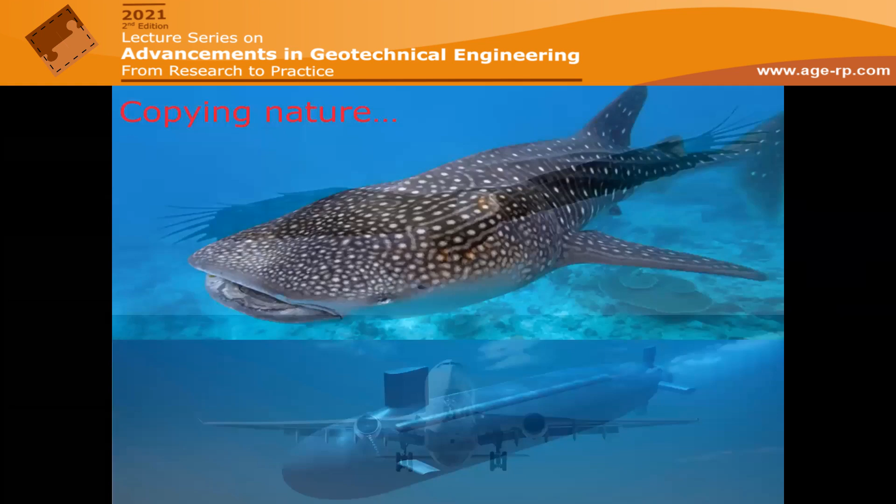So looking at any fundamental engineering concept, if you look closely you'll note that we engineers in many of these concepts actually copy nature. Like in this picture, we see an aeroplane designed as a bird lookalike, a big eagle, or a submarine designed as a whale lookalike.

More relevant to our subject today, if we look at the soil strengthening concept and how birds form their nests, the principle is very similar. They use mud and sticks to reinforce the wet soil to stay together, using weeds and branches - just like human beings, especially in developing countries, who still use the same technique today, combining wet soil or mud with branches or hay or sticks to create adobe bricks, still used to build houses in many parts of the world.

But the soil strengthening concept started way, way before. If we look closely behind these magnificent structures and try to understand how they're still standing, the first examples of soil strengthening date back to more than 3,000 years BC in the Ziggurat Walls. At the time the area was called Mesopotamia, today's Iraq. These structures were constructed using woven mats of reeds laid between sand and gravel - this is the concept of reinforced soil. Most of these ziggurats formed parts of temples for worship, also called stairways to heaven because they were very tall structures.

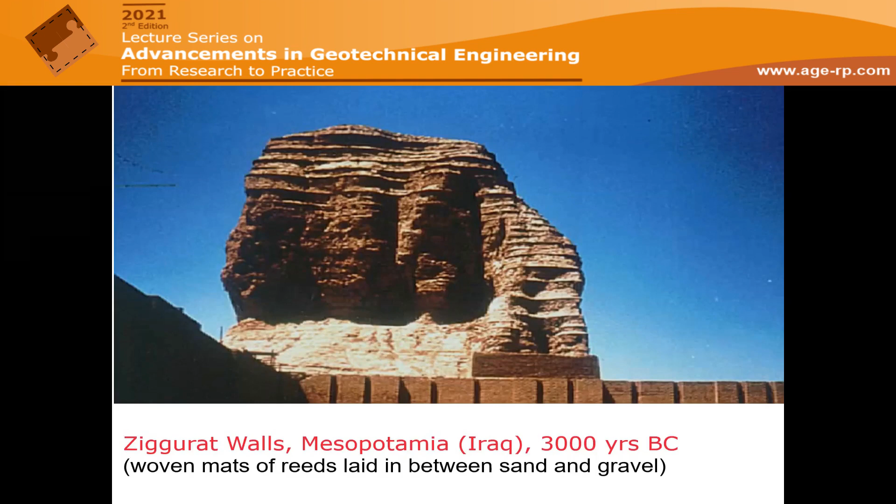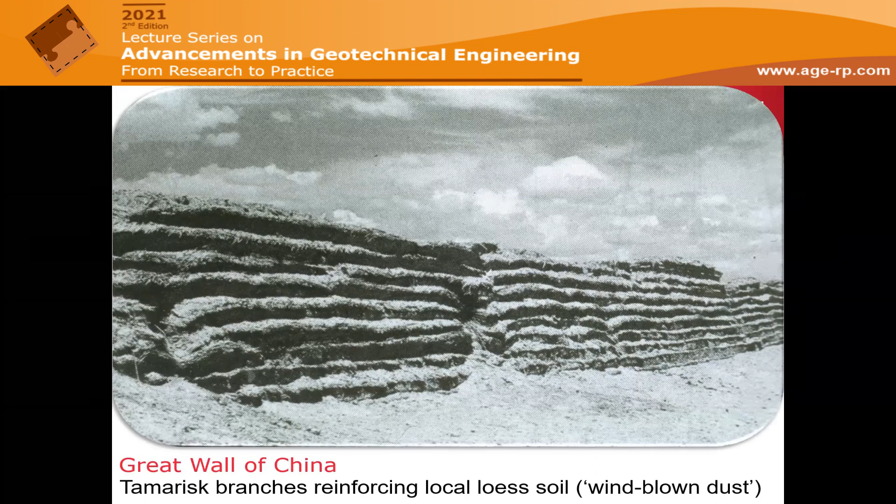Then looking further east, the Great Wall of China - many sections were built with tamarisk branches reinforcing local loess soil, also known as wind-blown dust. This is one of the beauties of reinforced soil: you can put it together using material available where you are. We'll see more about this a little bit later.

Even closer, further down the history, in Roman times, they discovered a timber wharf forming the Port Londinium, as it was called in Roman times, London. They found this 2-meter high port wall preserved in pretty good condition, preserved in the Thames mud, the river in London. This was just timber with soil, as you can see.

And credits - I'm going to be mentioning Colin Jones' name quite often throughout my presentation, because he helped me a lot to put this together, mainly for the historic part, through his book that he authored in 1985. I'm good friends with Colin, and we're still in good contact. He was very happy that I was putting this together, going back in history of reinforced soil walls.

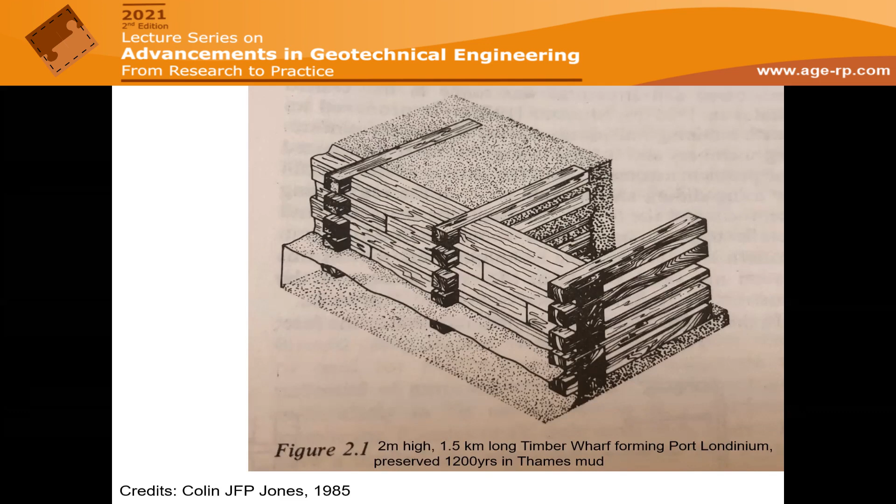Even closer, 1822, the Royal Engineers, people very close to my heart, were pioneers. General Sir Charles Pasley was the first to build retaining walls with brushwood, wooden planks and canvas, because he realized and proved that the inclusion of these reinforcing layers results in significant reduction to lateral earth pressures. There you go - the concept of reinforced soil earth in one small paragraph, conceived by this general of the army back in 1822. He had no numbers and didn't write any design books, but he used the materials and built these long-lasting structures.

So how did we evolve to modern structures? Well, the fundamental engineering concept of soil strengthening - nowadays we call it soil reinforcement - hasn't changed. Conceived thousands of years ago, it's still about placing geo-elements between soil layers to add strength and stiffness, as we've been analyzing further these days.

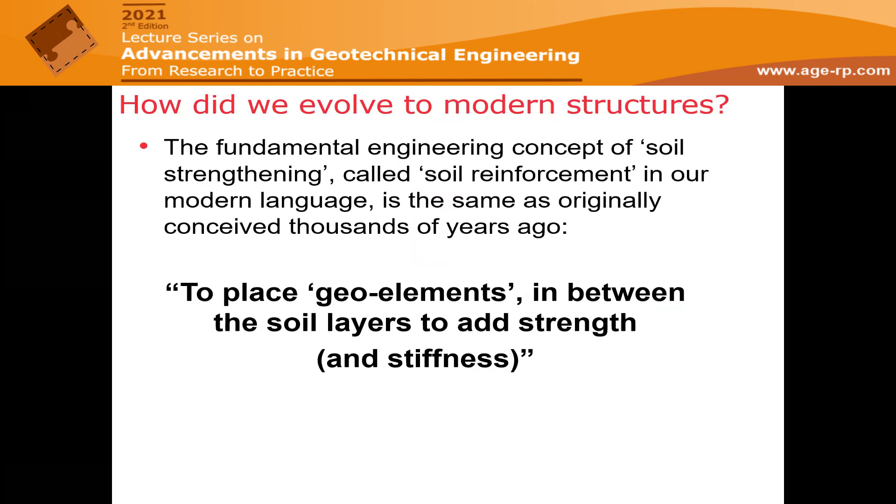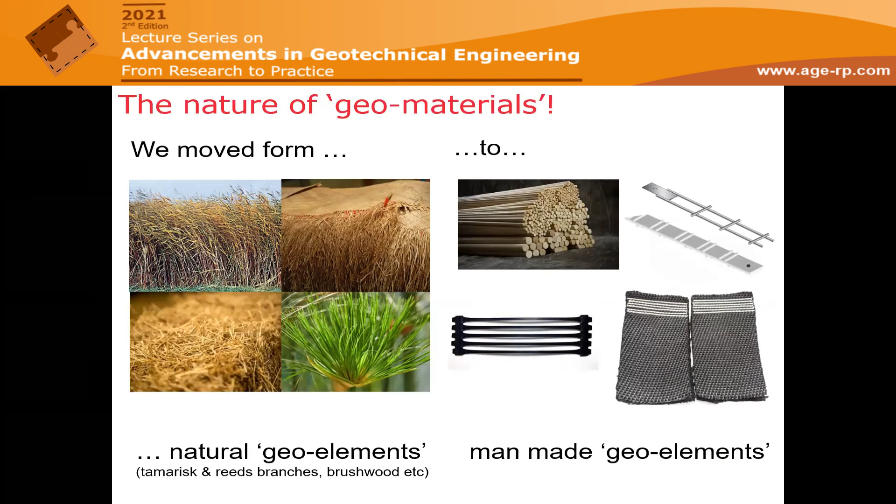So what changed? Well, the only thing that changed is the geo material. In the olden days, they used natural geo-elements, like we saw - tamarisk, brushwood. But nowadays we use man-made geosynthetics or geo-elements. We can use steel, timber - like proper fabricated timber - and of course polymer, like plastic, polyester, which we'll see in a minute.

Back to Colin Jones' book - the very first example of reinforced soil in modern days was in 1925 in USA, the Munster earth retaining structure, which was like wooden ladders that go behind the wall with a very light type of facing.

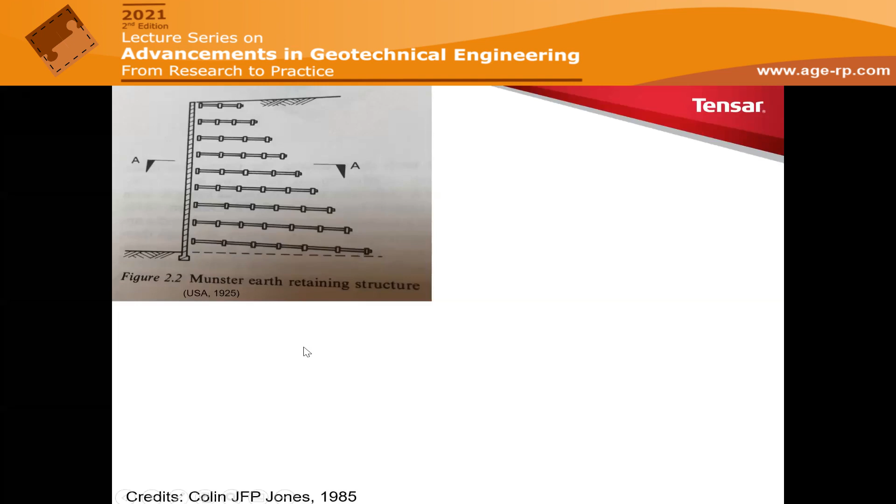Then in the 1930s, the Coyne retaining wall came along, with short metal ties with anchors, selected stone fill, and concrete precast facing at the front. As you can see, the way they placed this concrete facing, one inside the other, was purposely done so they could allow movement, because these people who started the concept of reinforced soil already understood it's a flexible structure - so whatever we do, we need to be ready for it to somehow breathe and move.

The third example, perhaps the most well-known, which most of the audience would have heard of, was Vidal's invention or evolution in 1960. He used flat iron strip reinforcement connected to U-shaped steel metal channel facing. He actually commercialized the concept and patented this MSE wall as Reinforced Earth, and I'm sure everybody knows of this system nowadays, with concrete facing.

And the last one, going back in history, probably a lot less known, is another method called the York method, developed in 1973. Again, Colin Jones was pioneering the development of this. It was just hexagonal concrete facings reinforced with glass, and the reinforcement strips behind the facing were also reinforced plastic with glass.

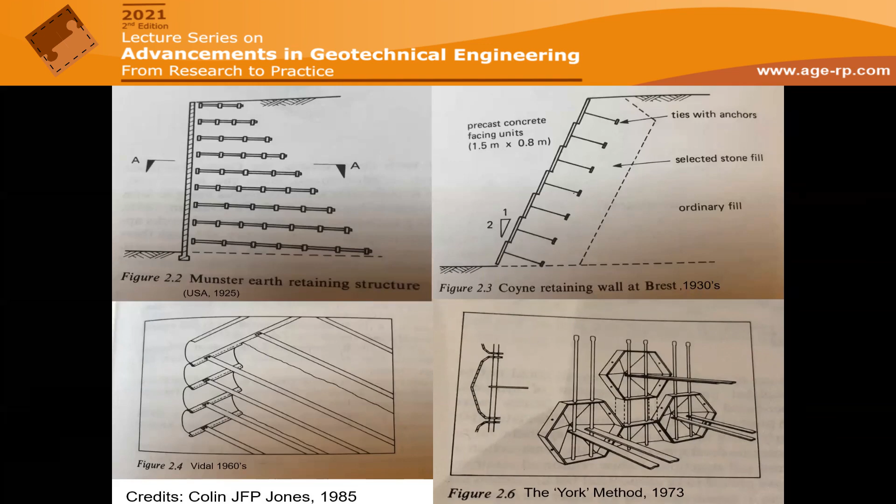This technology was first invented by a company called Netlon, and I think in many parts of the world, or for the elder people in the audience, will remember and recognize the name Netlon. And while these meshes were developed, through a lot of research and trial and error, a heavier net was developed through the same manufacturing method - extruded polymer.

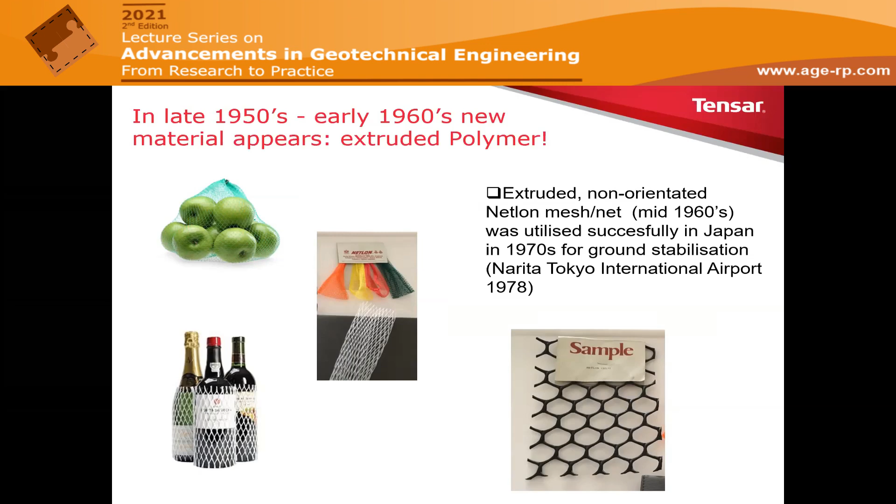But the mesh that they developed was slightly thicker, and the Japanese found out about it, because they always do. They looked at it and thought that this would have some engineering properties, or improve engineering properties, and they used it for the first time, very successfully, in Japan in the 1970s to improve the bearing capacity in Narita Tokyo International Airport. There are some photographs of laying this Netlon mat in Narita Airport, and they found out that it performed really, really well.

So the person who invented this new material, extruded polymer, was Dr. Brian Mercer. Dr. Mercer was British, born in the northwest of England, where polymer geogrid was also born. He was also a good friend of Salvador Dali.

There is a painting that Salvador Dali did of Dr. Mercer, which Dr. Mercer donated to the Royal Society in London, where he was an honorary fellow. It's hanging in a room named after him, the Mercer Room. And there's a photograph of Dr. Mercer explaining the properties of the geogrid to Salvador Dali.

So if we were in a room, I would ask you, who is the father of soil mechanics? Everybody involved in geotechnics would know that is none other than Karl Terzaghi. But now you know, if I ask you who is the father of geogrids, that's Dr. Brian Mercer.

So following the success of the Netlon mesh in Narita Airport, Dr. Brian Mercer saw a gap, because he was a great technologist but a great entrepreneur as well. He saw a gap in the construction industry, and he focused his interest and efforts, and he joined up with a group of mechanical and chemical engineers, and he came up with the Tensar process. So they used polymer, and not only extruded it, they punched it and stretched it.

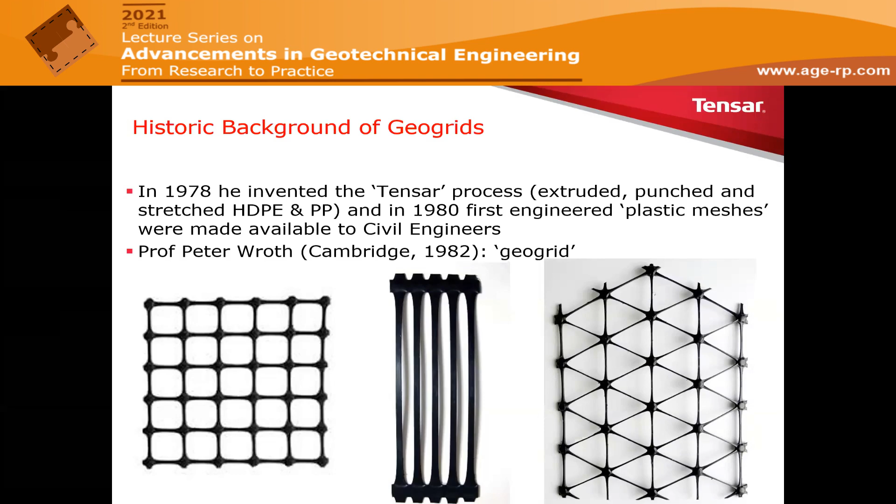So anyway, he went to places like Cambridge and Oxford, Strathclyde, places in America and Australia, many universities around the world, to find out how these geogrids perform. And like I said, true to his legacy, Tensar itself carries on innovating, and in 2007 we invented the evolution of the square geogrid to the hexagonal geogrid, but we're not going to talk about this today.

So, great invention those days. Imagine going to a civil engineer in 1980 and telling them you can build bridge abutments with plastic. People, the engineers, would just look at you and raise their eyebrows and say, I don't believe this.

However, we did manage to start convincing the important people in the UK. So we got the royal approval, and here it is - and today is a somber day, or this week it is, in the UK, as today is one week since His Royal Highness Prince Philip has passed away. But this is happy days, and in memory, Dr. Brian Mercer meeting Prince Philip and demonstrating how the Netlon grid works.

So like I said, how did an unknown entrepreneur from Blackburn convince the world? Well, there were pioneers and open-minded people and visionaries who gave us support. They saw the benefit of these products and the potential. One of these great supporters, Richard Bathurst, was one of them too, because he saw the feasibility of these new products. But a great visionary and supporter was Professor Colin Jones.

And I am very, very - I had a few various conversations in the build-up of this event with Dr.

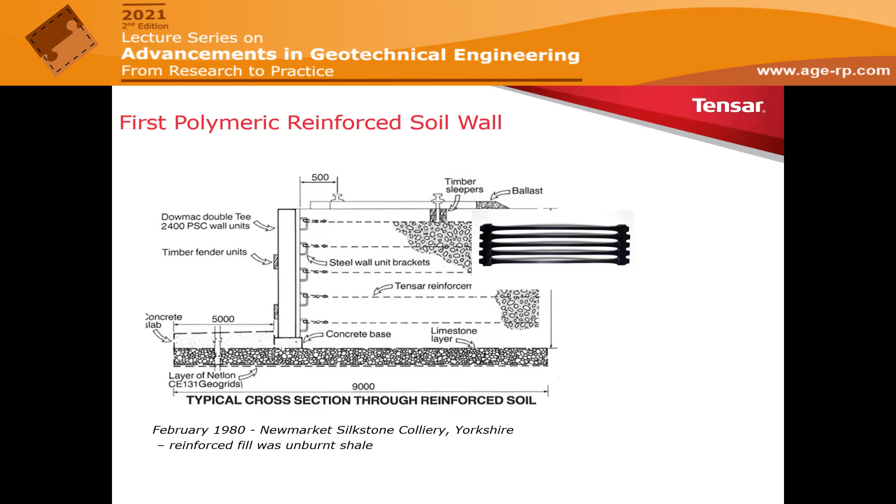They had an existing railway embankment. It wasn't high, only 2.5 meters high. But as you can see, it was eroding away, and you can see the sleepers hanging over. This railway was carrying all the mine waste from surrounding coal mines in Yorkshire, because in those days coal was the main source of energy. So they had to remediate this embankment, because of what it was doing to the tracks up above, causing a risk of derailment, as well as slowing down the production and the whole cycle.

So what Colin Jones did, he came up with a fantastic idea. Remember, from the beginning, you always have to remember that these are flexible structures, and you have to allow and cater for some sort of movement. In this particular case, Colin Jones designed a reinforced fill. They actually used the mine waste, which is soft and wet and not particularly strong, as you know. As a facing, he used these precast wall units, but the clever bit came in the way that he connected the facing, reinforcing the mine waste with our geogrid.

You can see the Tensar geogrids, but the way he connected them to these steel wall brackets - why did he do that? Why didn't he cast them? Because he knew that this material would move. So he allowed for controlled settlement. The geogrid could slide down as the mine waste was settling over time. So that was very, very clever. And of course it worked.

Also at the base, because the existing foundation soils were not brilliant either, he used the same material, this Netlon heavy mesh that was used in Narita Airport, to enhance the bearing capacity of the existing soil. So there you have it - that was the very first wall, and he used timber fender units, because of what would happen here. Let's go to the next one. I thought I had a photo of the finish, never mind.

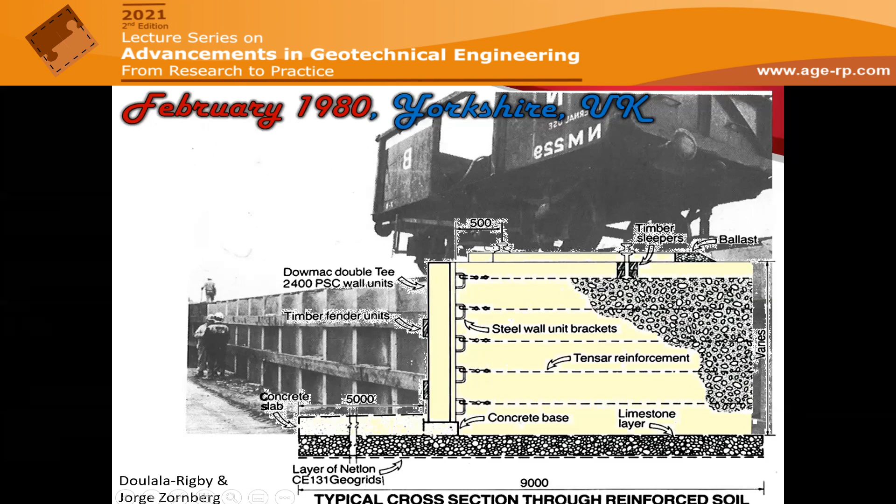What was happening was that the wagons would bring in the coal mine waste from the surrounding mines, tip it over here, and big lorries picked it up and disposed of it safely. This was the reason why he used the timber, to protect these precast wall units. There is a paper on that I co-authored with Colin, published in Berlin, I think in 2014. So that was the very first civilian wall for railway purposes.

At the same time, the Royal Engineers heard about this product, and they too realized the ductility and the flexibility that an MSE wall structure has because of this material. Again, with no design method, Colin also worked with the Royal Engineers, Professor Johnson, and helped them design and build these walls. These walls were built to protect what is in this building - ammunition - using these walls as ammunition blast bunds. So in case something went wrong and there was an unplanned or accidental explosion, they contained the explosion, because any shrapnel would be nicely absorbed and contained within the flexible Tensar walls.

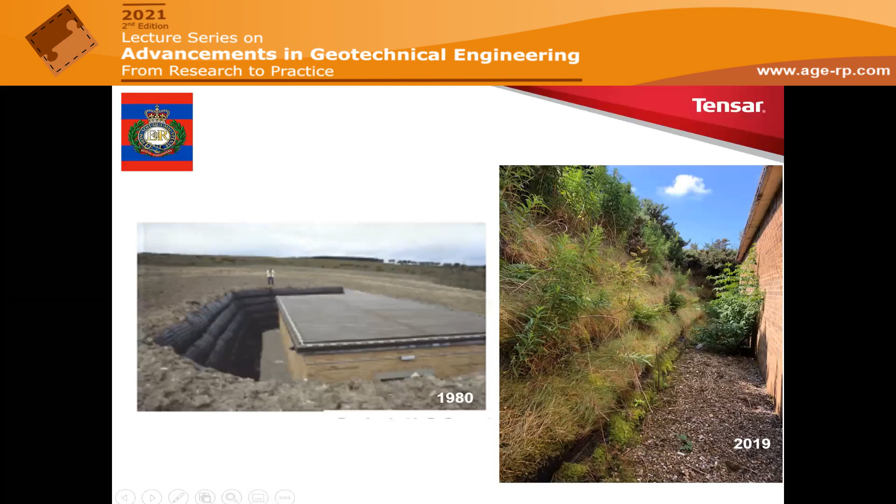So that was in 1980, and this is 2019, where I had the privilege to go and visit this same wall. So this is the building, the back face of it, and this is the slope, which is still standing up 40 years later, absolutely no problem with it, nice vegetation. So very, very good testimony of the resilience of these structures. And from these humble beginnings of almost 40 years ago, nowadays we've moved to structures that Dr.

Mercer would have never dreamed that we would ever reach that high. So this is our highest wall, Tensar's highest wall, and one of the highest MSE walls in the world. It's 60 meters high, it's a tiered wall, as you can see, built in three sections of 20 meters each. It's in the Middle East.

It joins Fujairah and Dubai, and it's not just a wall, it's an embankment. We'll see more of this later on, but the actual construction is pretty much similar to where we started 40 years ago.

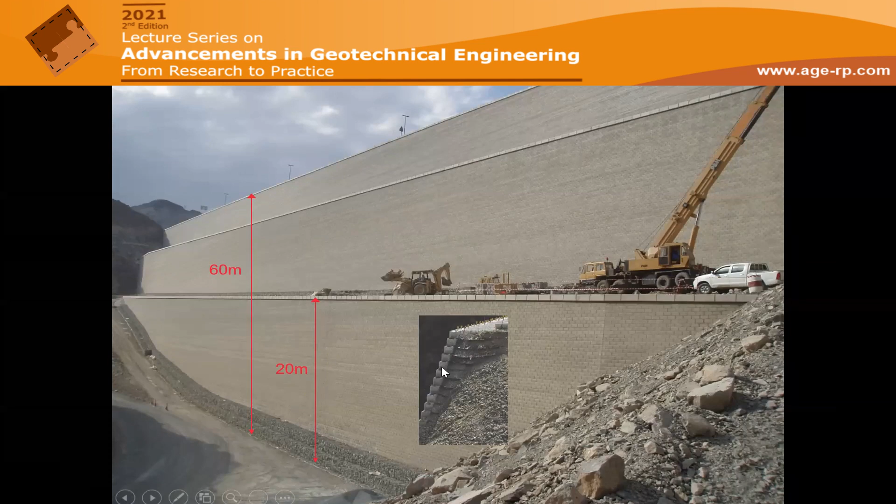The way this wall is built is just dry laid, and that's why it's so fast and easy to build. There are geogrids, good granular fill, compacted, and just modular blocks at the face, dry laid. The geogrids connect in between the facing blocks to a blue connector, creating a very nice mechanical connection, which is actually fantastic in performance, especially in earthquake regions - but that's a different subject altogether, so we don't have time to talk about it today.

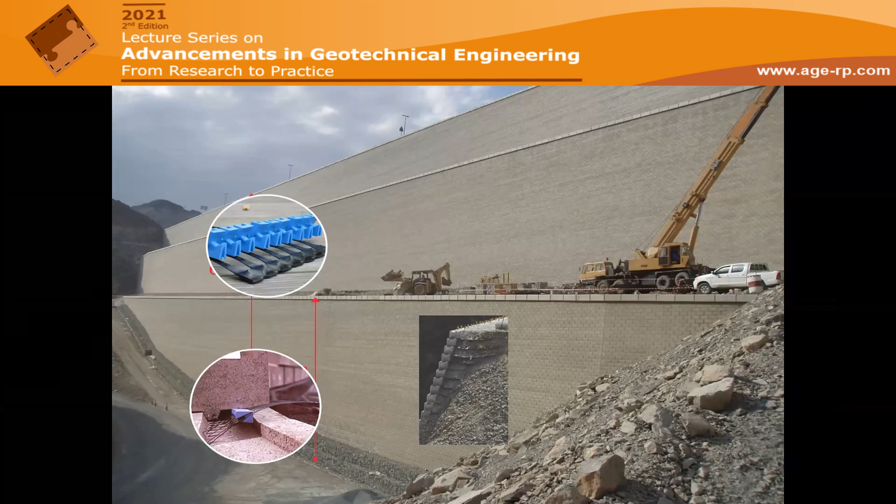Because of the week that we're going through in the UK, I just thought, as a tribute to the big man, His Royal Highness Prince Philip - I don't know how many people know about his involvement with engineering. There's been quite a few posts in social media and LinkedIn, but whoever did not know, Prince Philip was fundamental in the establishment of the Royal Academy post-war, because he wanted to connect all the different engineers - mechanical, electrical, chemical, civil - to rebuild England. He was a very big supporter of engineering, and he strongly believed that engineers are amazing people.

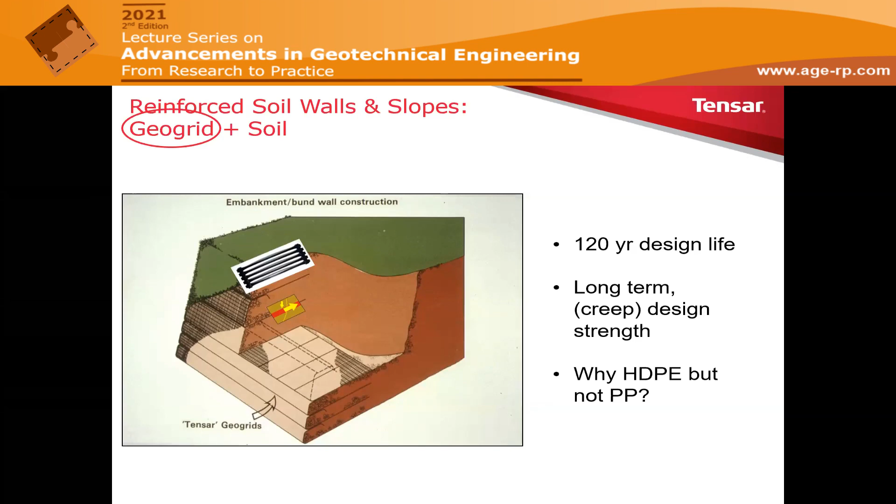So to simply explain this, of course it's a massive subject, but I hope this couple of slides will explain it to you. So we do our creep test, and this is a logarithmic scale on the x-axis and a normal scale on the y-axis. What we see is strain versus time, which is basically what creep is, so sustained load over time.

We've got an HDPE grid to the left, a creep test, and a PP or polypropylene geogrid to the right. They're both under creep tests at 20 degrees and with the same QC strength. So the ultimate tensile strength is the same for the polypropylene grid and for the HDPE grid that we are testing, and that's very important.

So let's see the load at failure, let's see what's happening at failure, and let's take this sample. These are different samples that we test or creep at different percentages of QC strength.

Let's look at two of them that are both at 47%. So if the QC strength, let's say, is 100 kilonewton, the HDPE grid is being tested in creep at 47 kilonewton, and failure occurs in 2 years, okay? For the same QC strength and almost 47% of it, so 47 kilonewtons, assuming the QC strength is 100, just a random number, we see failure on a polypropylene grid happens in 4 days, and this is absolutely massive.

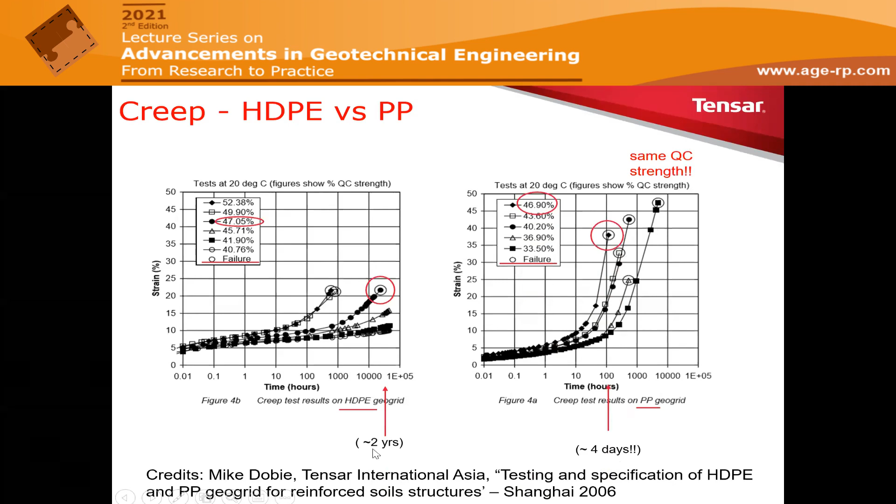So in real terms, what that means is when we design a normal wall, a 5-meter high wall, if we design it with high density polyethylene for 120 years, for exactly the same soil type and supporting the same load, we only need 11 layers of geogrid of a certain QC strength. But if we opt to design with polypropylene geogrid, because you use the creep strength and not the QC strength, for the same performance, 120 years design life, we would need 31 layers of geogrid. This is just massive because HDPE has got very good creep characteristics, but polypropylene doesn't. This is exactly why we use high density polyethylene and not polypropylene, even though polypropylene is much, much cheaper.

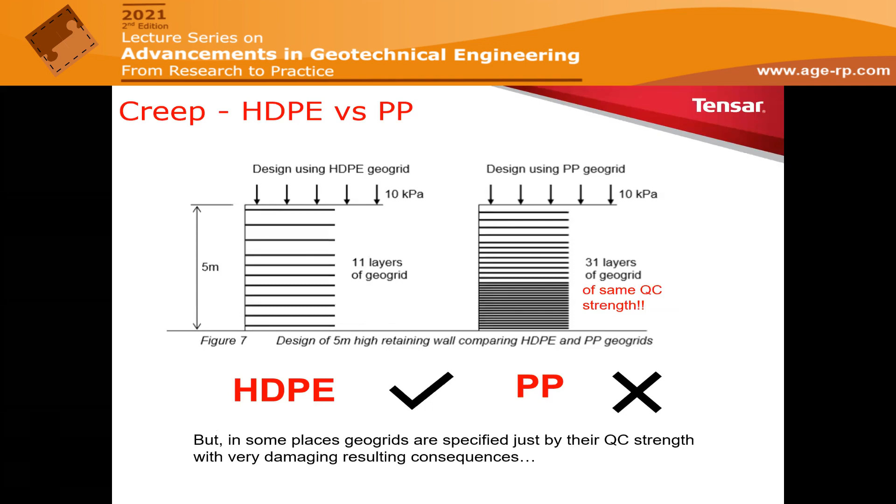There's a few published papers. I forgot to acknowledge, I hope you read it on the slide, that my colleague Mike Dobie has written a few papers on that, and you're welcome to have them.

So reinforced fill compliance, what's that all about? What's the other part of a reinforced soil wall? Well obviously it's the soil, and actually it's the biggest part of a reinforced soil wall. If we can say, it's like more than 90% in a reinforced soil structure is soil, and a very small percent, important but small, are the geogrids.

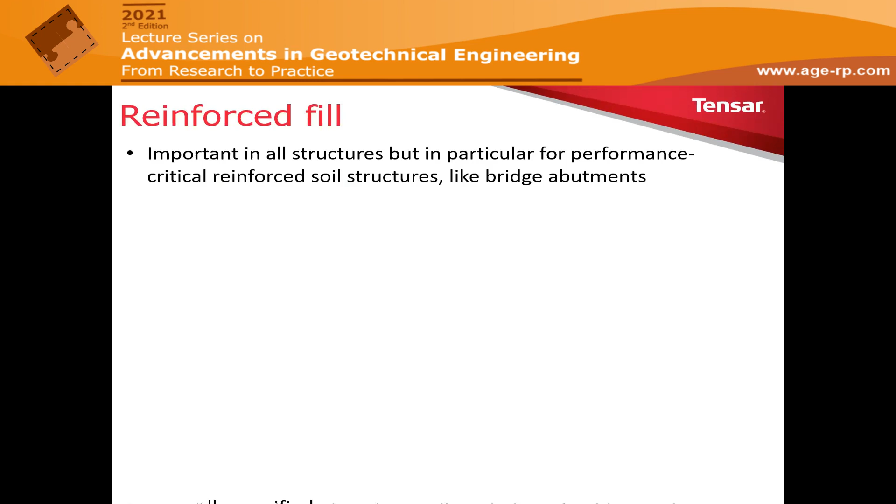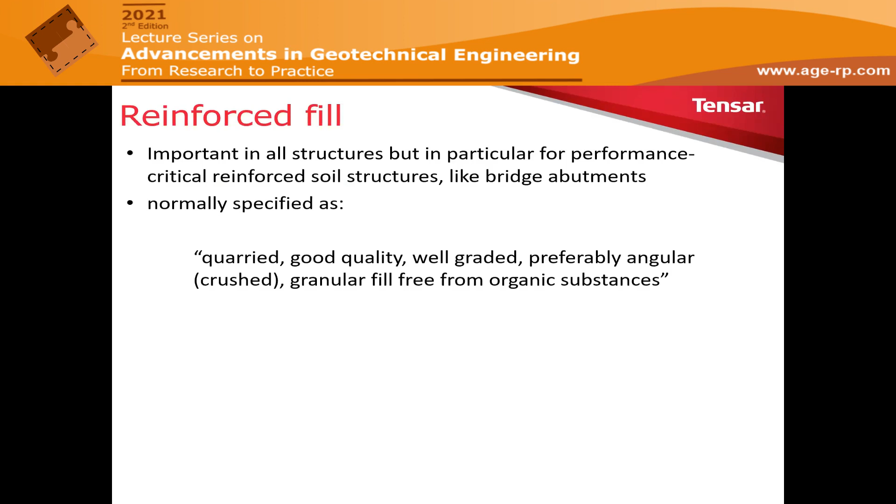Important in all structures, but in particular for performance, it's even more important for performance critical reinforced structures like bridge abutments. So the normal way to specify fill in bridge abutments, because it needs to be of highest quality, is quarried, good quality, well graded, preferably angular or crushed, granular fill free from organic substances. This is just a specification you would expect to find in a design of a reinforced soil bridge abutment. So what is important when it comes to reinforced fill? Well, it's the fill quality provided on site.

So we do the design at the office, we write the specs, but what they do on site is the bit that matters, and the two must comply. And of course, the second important bit is the placement, which we'll talk about next. You would think both are common sense, and everything I'll be talking about is common sense, but I'll tell you what happens in reality and how people forget about it, sadly not always the engineer.

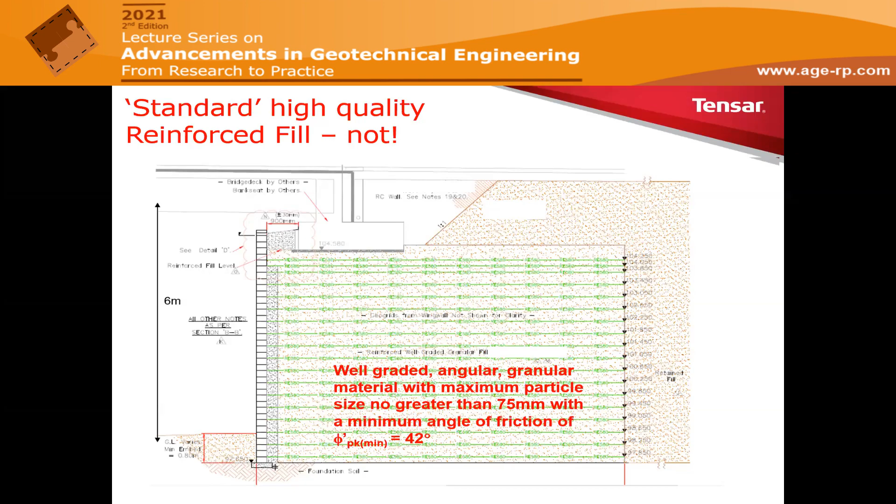What happened in this project was very difficult, but we did manage to get these bridge abutments demolished just before the bridge was placed. It was very painful, but in the end we got to the right conclusion.

So the lessons we learned: no matter what, always confirm the design assumptions, always make sure there's some sort of a site check. I know that sometimes in our industry, Tensar for example, we don't take responsibility for site supervision, but we always keep close - we always have connection during construction.

So the designer - some people might say 'this is not my responsibility because the fill is under the contractor's responsibility' - it's wrong. The responsibility of the designer in health and safety is exactly the same as the responsibility of the contractor. Please remember this and always keep an eye, always check that what you specified is being used during construction on site.

It's very easy to get bullied by big contractors or commercial pressures, thinking 'if I tell my client that the fill they're using on site is not the right one, I might upset them and they might not give me any further jobs.' It's better to say it now rather than later, because you can avert a disaster.

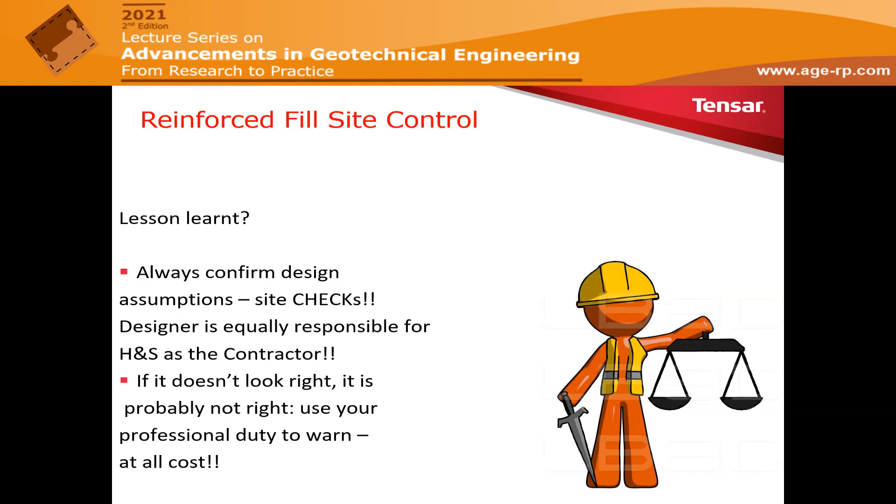So moving on, compaction and workmanship. Good compaction - I hope, again, everybody in the audience knows why it's important.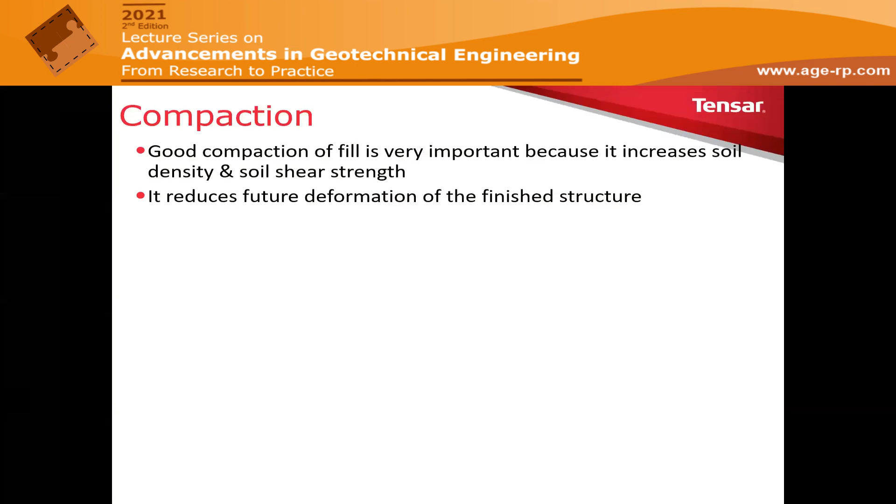Of course, compaction increases the density and the shear strength, and it reduces future deformation. So make sure you use an appropriate compaction method and compaction plan that suits the fill material.

When you have granular material, you normally use a vibrating roller. If it's more cohesive, you might use a sheepsfoot roller. So always be aware of what is being used.

Place the fill in an engineering manner, normally at greater than 95% of maximum dry density, or in accordance with your local construction standards, but as long as it's in accordance to something, and ensure that site-specific testing is undertaken on site to prove the required compaction.

What are the added benefits of good compaction versus bad compaction? This is a clever lesson learned, a nice case study. These are the big walls in the Middle East that we'll see again later on.

Because the project was so vast, with boundaries different between different contracts, a big boulder came down the hill. You see how rocky it is, and it hit the wall and created a massive hole. But did it matter? Well, not really.

It did not matter to the stability of our structure, because as you can see inside, between the grid layers, the soil is perfectly straight. That means the compaction of this soil was exactly as per specification.

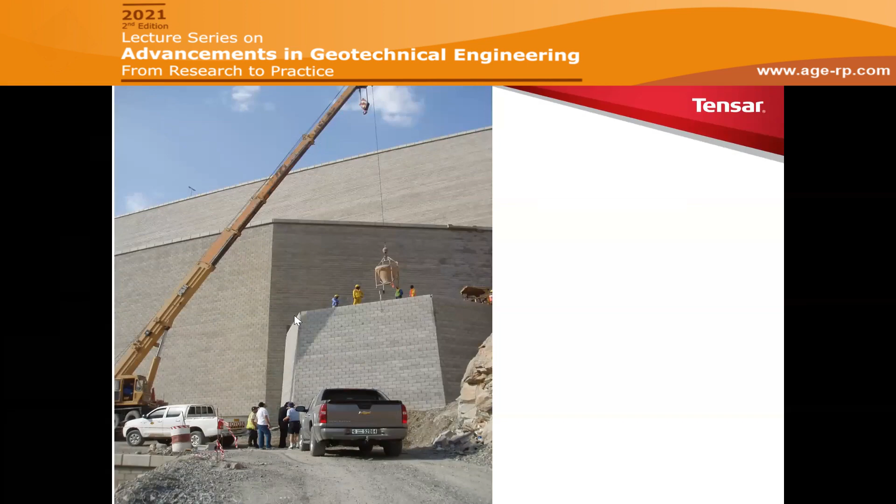So no problem at all to the construction, and no problem at all to the progress of this wall. While they were building this plug, the road on top was being constructed, so no delays and no reconstruction, just an add-on. And this is all because of good compaction.

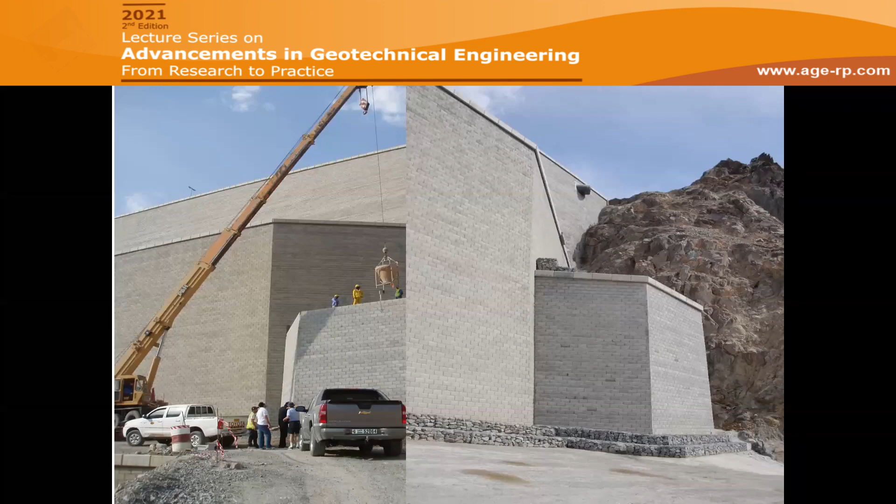But sadly, that's what happens when compaction is not there. This is another project somewhere else in the world, it doesn't matter where, where there was very, very poor compaction. And actually here you can see light - the whole of the soil just washed out.

This is the drainage that you put behind the face, but yeah, the whole thing came out. So this wall cannot be fixed - it needs to be demolished completely and reconstructed from scratch. That's bad compaction and bad workmanship.

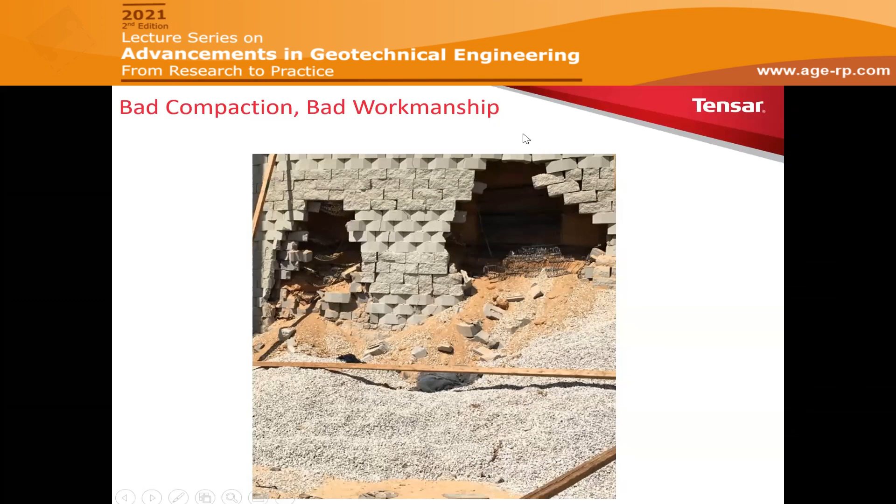Drainage - that's the first thing you are told, and it's drilled into your head when you join a geotechnical degree. Drainage is one of the most important things, if not the most important. Water is the source of all evil when it comes to geotechnical structures.

There's a lot of advice in the literature on how to deal with water, how to put drainage. This is an extract from Hong Kong Geoguide 6, and we can see that the drainage layers are there, but none of them daylight to the crest - they're always at a distance. This must not reach the surface of our structures.

A drainage system is there to help water come out of a system, not to let water into it. But it can let water in if it's badly detailed. There's an example of this.

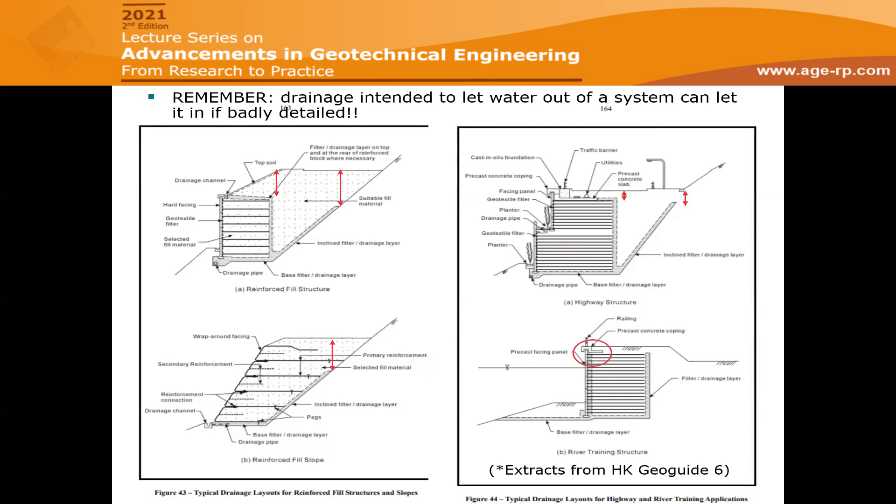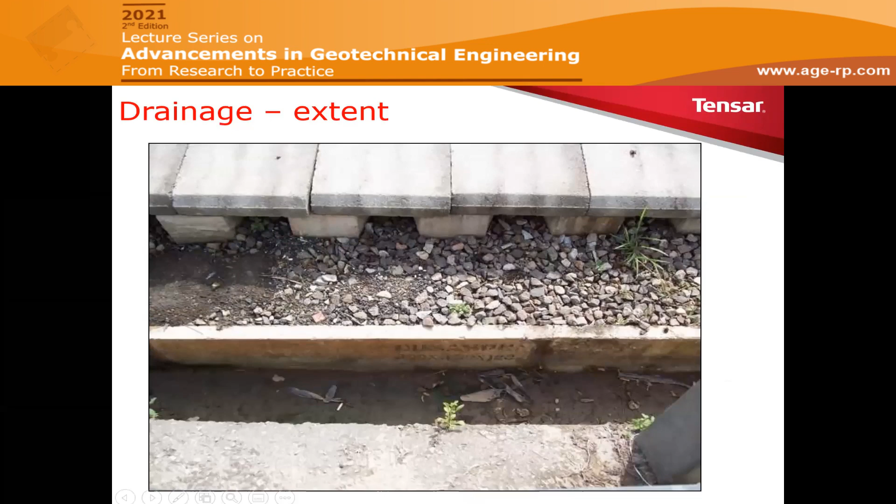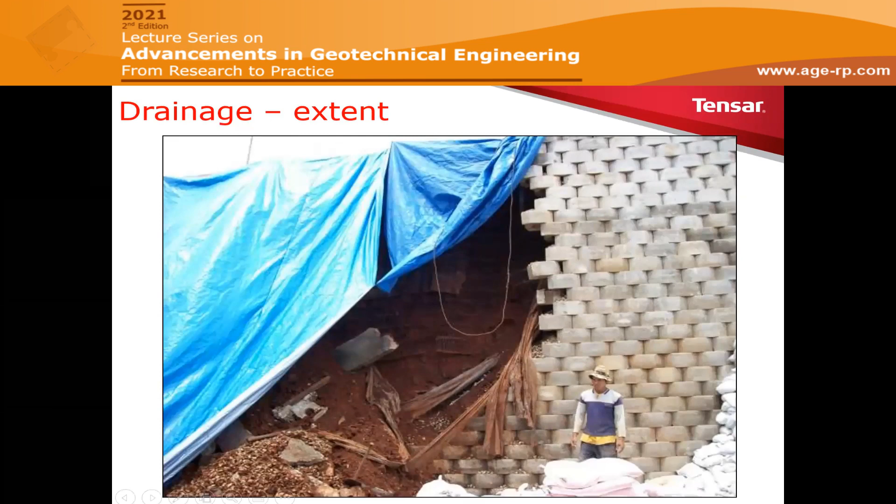This is a wall somewhere in the Far East, and this is what happened where the red circle was. This drainage, unfortunately, daylighted all the way to the top. It let the water in, causing excessive water pressure because the soil was quite cohesive. It knocked the facing off, and the wall failed basically, so they had to go and put a massive buttress to reinstate it.

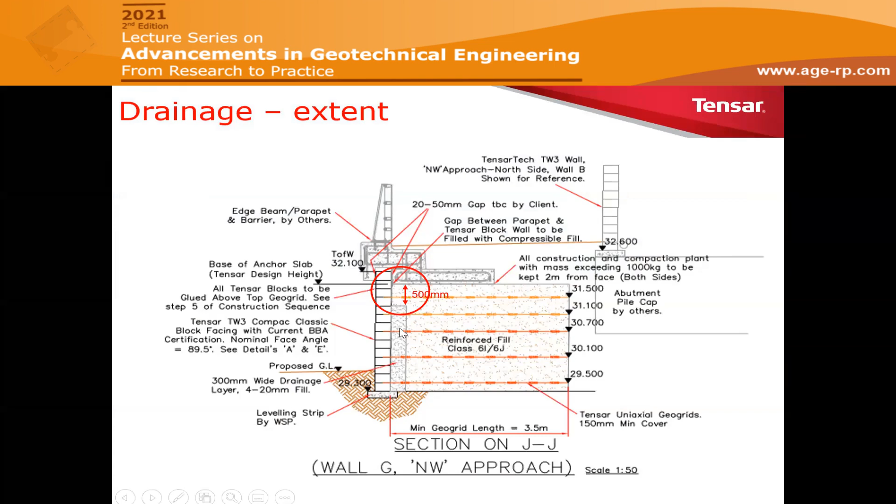A good detailing, like I said, is to leave at least half a meter from where your drainage finishes to where the wall crest is at the top. You stop there, because if it goes all the way to the top, it becomes a funnel that welcomes the water instead of stopping and only acting to take the water from the back. Another good detail is to provide adequate surface drains for the expected flow.

Nice crest channels at the top of your walls, and also appropriate crest inclination, should always be dipping towards the front. There must be some inclination here rather than going towards the back. If you expect ground flow, make sure you've got chimney drains at the back to intercept it. And as said before, this drain must never reach all the way to the top.

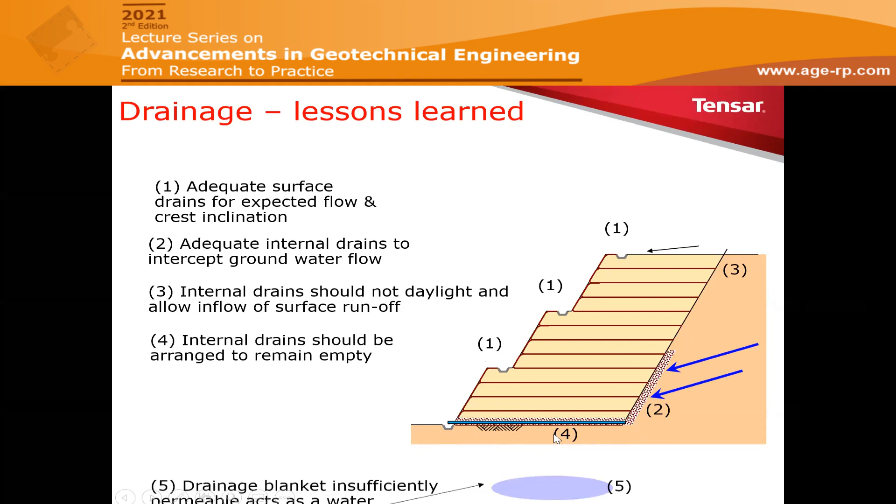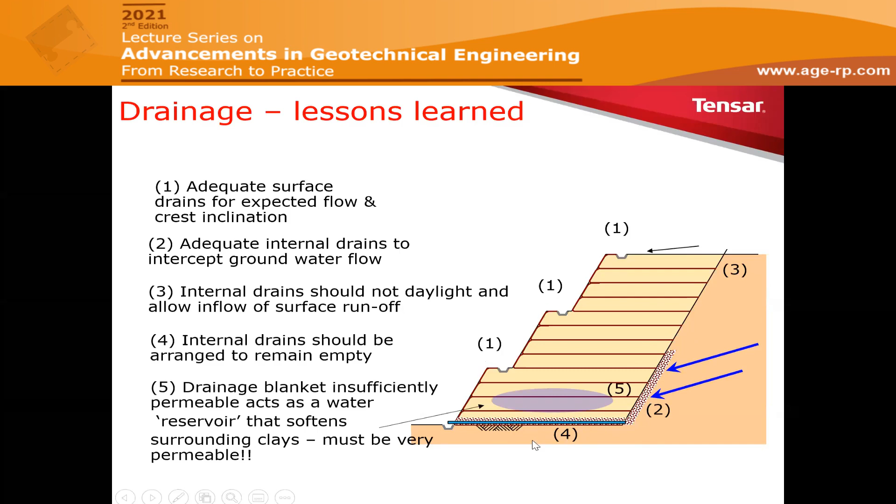The internal drains should be arranged to remain empty always. And of course, the blanket at the base, the drainage blanket, must be of appropriate permeability, because if it's not permeable, it will act as a reservoir and soften the surrounding clays.

Scour protection - these are the walls. Why is it important? These are the walls that came before the big walls I mentioned. They're also in the Middle East, but they're just a single tier and only reach up to 18 meters. Same method, same construction, modular blocks.

If we were face to face, I would ask you what is strange about this photograph, what is missing, but sadly we can't. Can you see? Although they provided scour protection here because we specified it, they forgot, or the contractor might have run out of material, so they just left it like this.

So what happened then? These walls are next to a wadi, and I'm hoping everybody knows what a wadi is - it's like a natural stream course that most of the time is empty, but during heavy torrential rain, it becomes a river. You can see here how the drainage comes out of this wall, and this is what happens.

Where you can see here, scour stops, and this has got no scour, the wall facing collapses. What happened was the ferocious flow of water washed out the fines at the bottom of this modular block wall, because as you remember, it's all dry laid, and they just fell off.

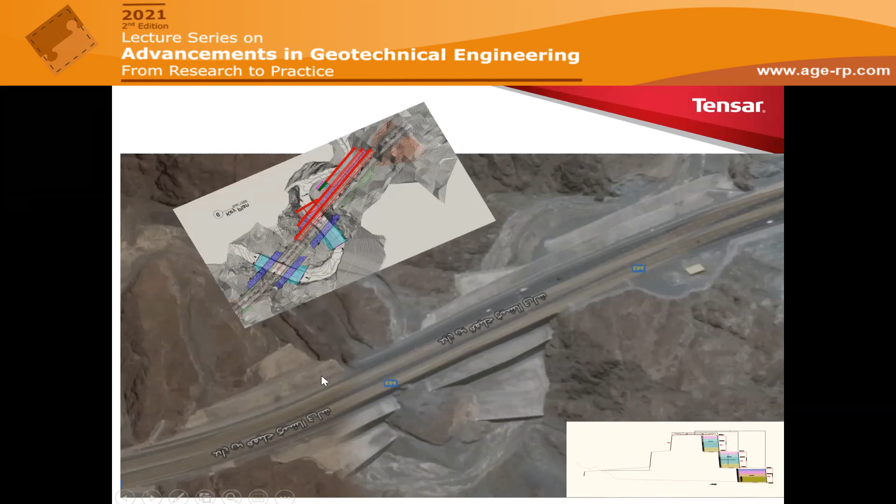And the low berm - we can see that to save money in this project, we used a better quality fill for the reinforced soil block with an angle of friction of 42, like I mentioned, but for the retained fill we used a lower quality fill, just 40 degrees angle of friction, which meant it could be possible that because this is tighter, compacted, and made a denser block, there could be water pressure collecting through infiltration.

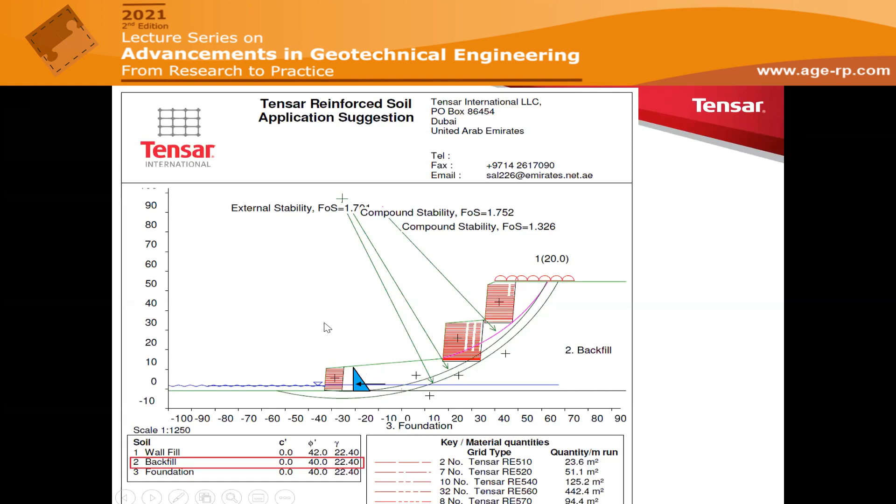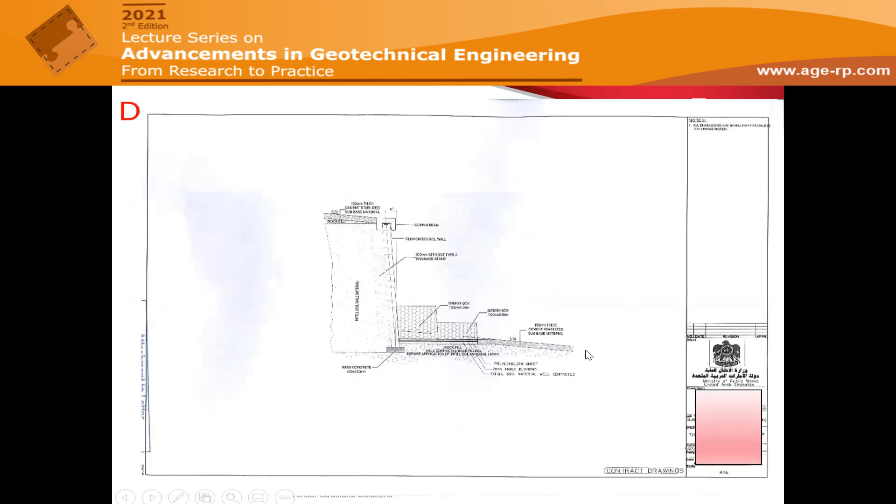So to avoid this, on top we made sure that this berm was treated with cement stabilized fill and appropriate gradient on top, like I said already before in the drainage discussion.

So there is a picture of this section, and there's the lower tier with the 4 openings of the culvert for the water during a storm, that during construction was used for traffic, so the lorries could go in.

And this is a section through it, so we gave that a 1 in 10 inclination, and of course you can see the gabion walls, the gabion scour protection, like I said before.

And there is a paper for that as well, and it was published in Africa, in Zimbabwe, I think in 2011.

Non-standard unsuitable fills. So what are non-standard fills? And first of all, why do we use them? Well, we use them because they save cost, carbon, and time, and therefore they make MSE walls a very, very sustainable option.

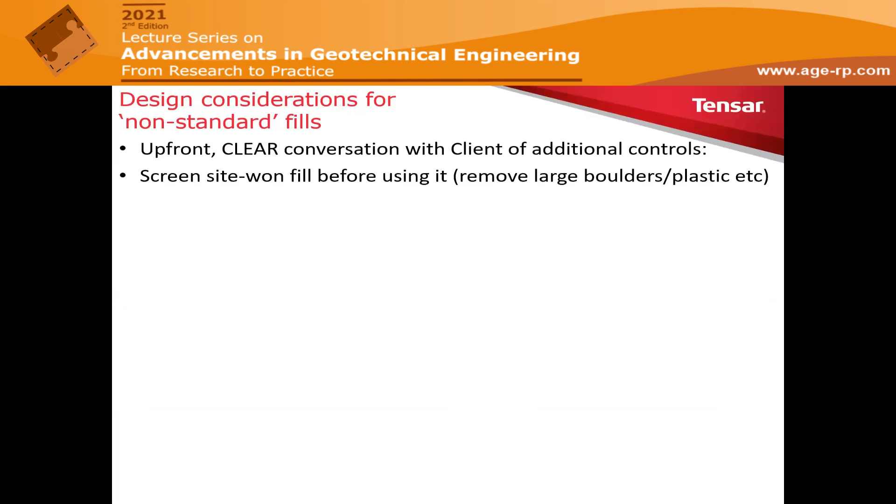So when we do use non-standard fills, what do we have to do? We need to have an open conversation with the client at the beginning. We need to screen the site won fill to remove large boulders. If the fill is very unusual, we need to do fill-specific installation damage testing for our geogrids because that affects performance. We need to do specific shear box tests for the unusual fills at the correct rate of shearing.

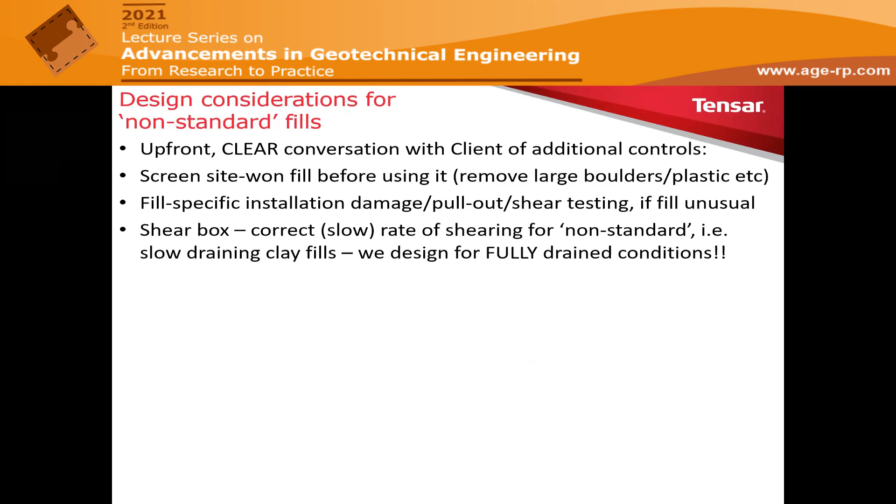So if it's very cohesive, we know it's going to be very, very slow. So we need to set the rate of shearing at low levels to make sure that what we test is fully drained and not semi-drained.

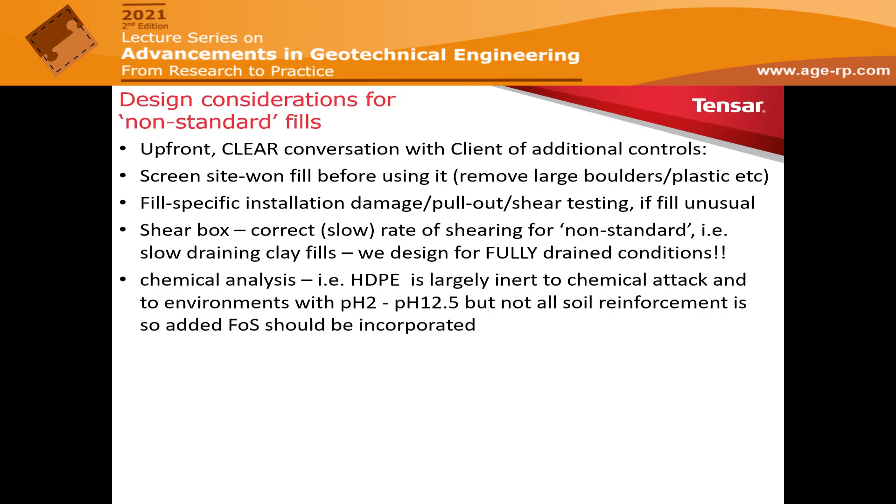We need to do chemical analysis if we expect contaminated soil, because high-density polyethylene is the same material they use in landfills, and it's okay for chemical attack for pH between 2 and 12.5, but not all soil reinforcement is resilient to chemical attack, or steel reinforcement for that matter. So always make sure that it's tested.

Adjust the rate of construction, because sometimes we need to slow down to accommodate pore water pressure dissipation. Try and make sure how your fill is compacting and how you can traffic it, if it's cohesive in particular and high in moisture. Watch out for drainage, especially when the fills are like pulverized fuel ash, and we see an example, or chalk, and place the right controls, especially if the climatic conditions are adverse.

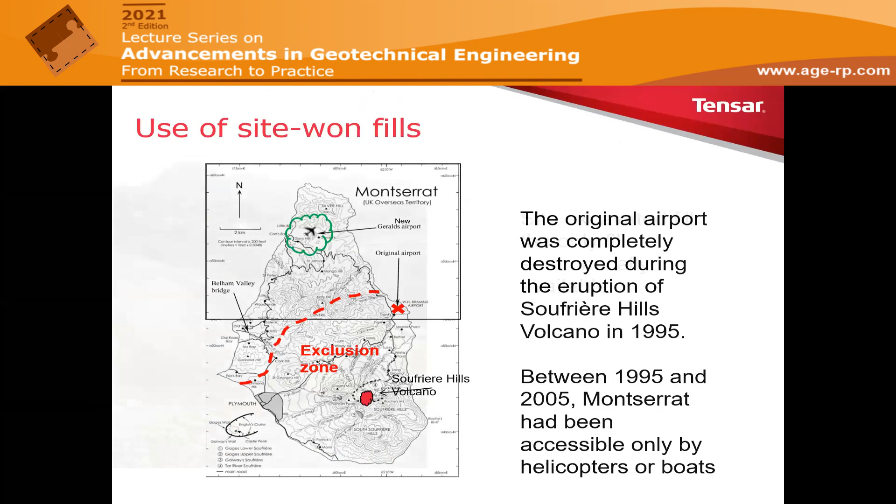First example comes from Montserrat in the Caribbean, where the old airport was destroyed by a volcano eruption. So we were asked to go and do the new airport, and there was no imported fill available to come through. So we used the site won available material, and you can see the excavation.

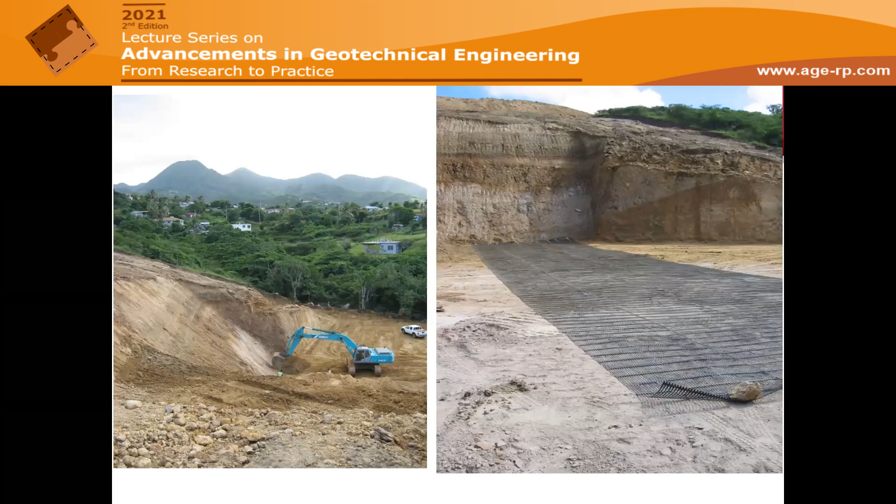So the good practice here was they had to screen the site won material, like I said, and remove the big boulders as the guys are doing here. And this is the finished picture of the airport and the embankment, which was about 31.5 meters high.

Another example in Malaysia, a very big landslide, more than 60 meters. The good practice here is that they had to slow down the construction because obviously they used the same material, and because it was highly cohesive, they had to slow down and adjust it to accommodate pore pressure dissipation. And this is the finished product of this.

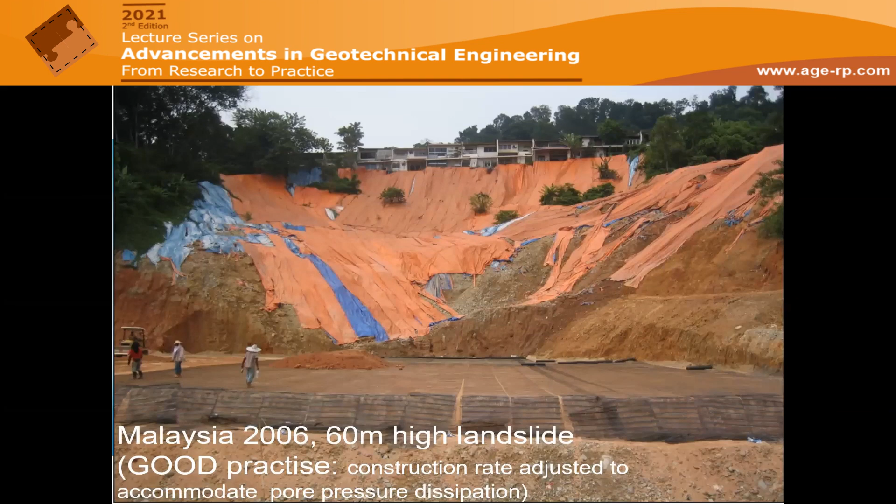Another project, and this - I need to give credits to Patricia Escobar from Geosynthetics.

They had to do a 14-meter high working platform, and accommodate a raised level with an MSE wall to support a 1,000-ton crane to assemble a new tunnel boring machine to remediate an aqueduct somewhere in the UK.

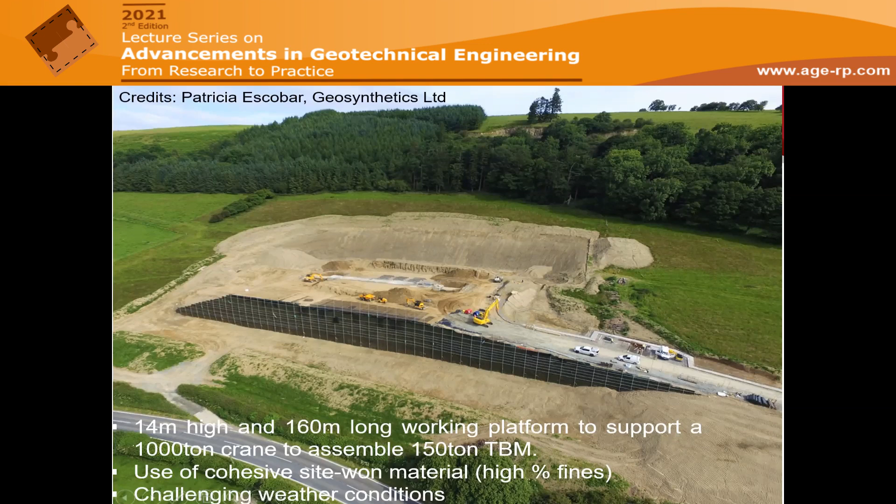They used cohesive soil site won material, high in fines. On a sunny day, no problem at all to compact and lay this material. On a wet day, a disaster. So what they did, they put a lot of controls on site, and I'll just go quickly through those.

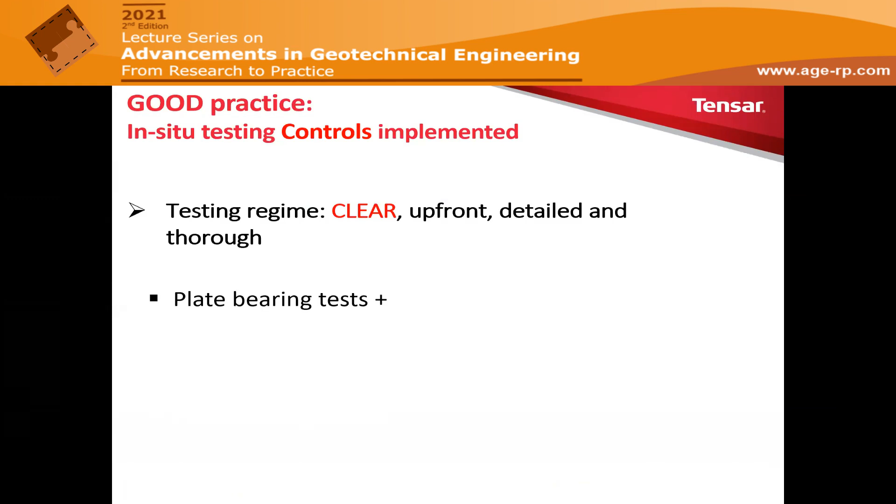So they had this conversation with the client, and they organized exactly how many plate bearing tests, shear vanes, core cutter, bulk density replacement, whatever, and how to do the tests on site. And specifically what controls they put in place.

So excavate the first 2 meters and replace with lean mixed concrete, and behind the 2 meters, replace the site won with granular fill until the weather gets better. There is a paper for this as well that Patricia has written, so I can put you in contact to get this paper.

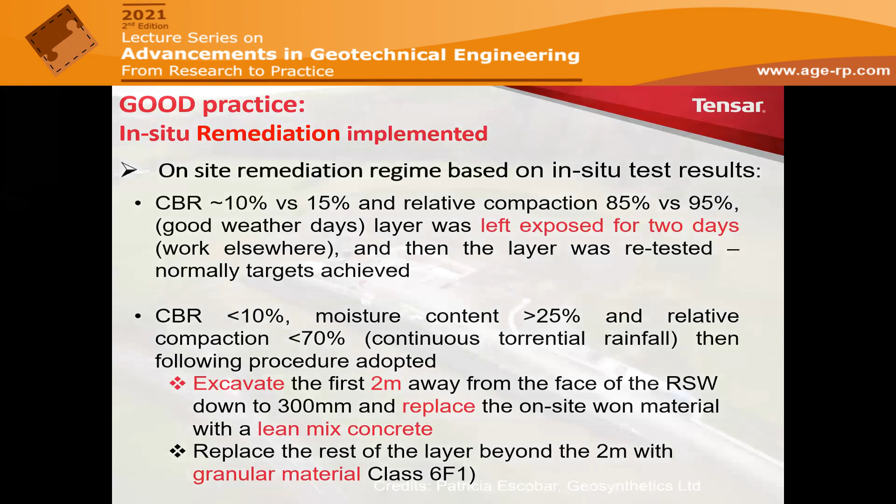Another good practice we learned is when there is cohesive and lower standard material that needs to be used, it can be accommodated behind a buffer zone. So in one project we used 3 meters of granular fill at the front, and put cohesive material with very low angle of friction, high plasticity, behind.

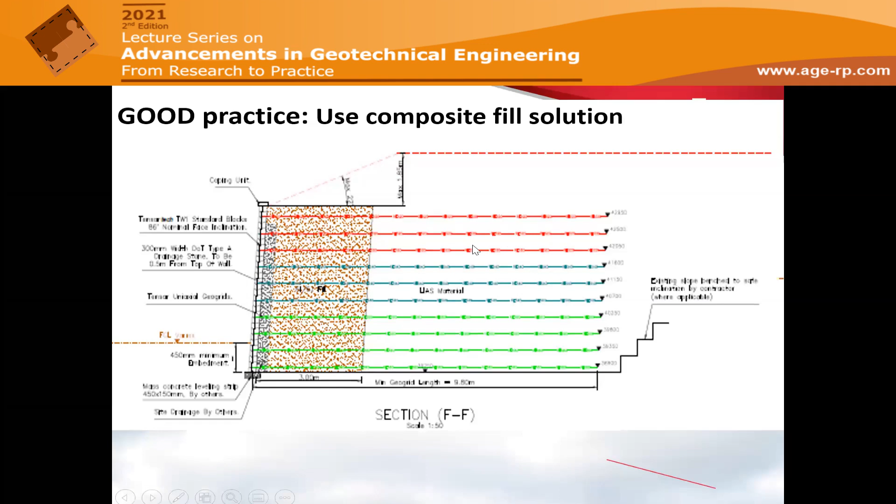Another material, which is again a byproduct, a waste product you can say, of coal-fired power stations, is called PFA, or pulverized fuel ash. It's very fine but granular, though in time it kind of cements. It's got an angle of friction typically around 27, and it's very alkaline.

So if you're using polyester or steel strips, you have to be very careful and either factor it down a lot, or you can use high density polyethylene like we do, or we did, and it's absolutely no problem because they are inert to chemical attack.

In this case, there are standards in the British Standard that tell you exactly how you need to place this material and the drainage layers around it, with all these clauses. Also, because we're working up to a certain flood level, the good practice we did was to replace the lower part of the wall up to the flood level with free draining granular material instead of PFA.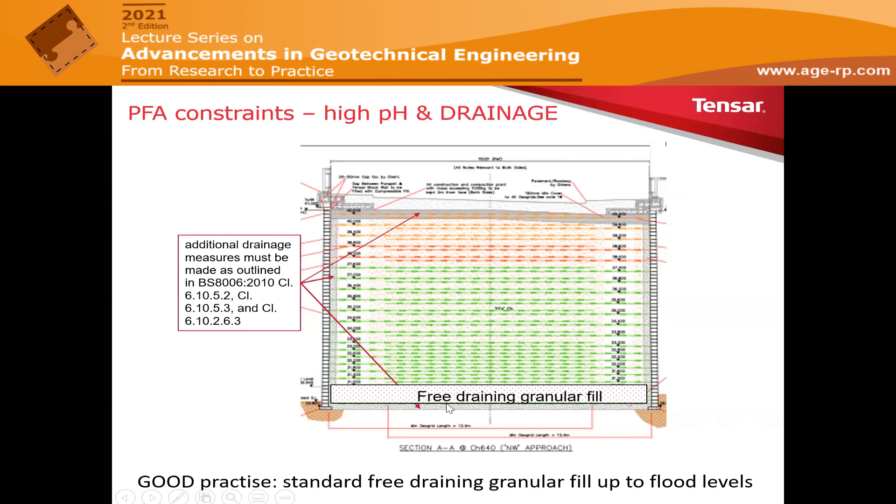Again, there is a paper I authored for this, and I presented it in Geo Americas in 2016. Welcome to have this one as well.

This is a very interesting project where we were called to see whether we could remediate a landfill in waste material. This was a landslide in Wales somewhere in 2005, approximately. It was a pre-regulated landfill, so nobody quite knew what was there or what was dumped, but it was in a matrix of soil.

The consultant gave us the soil properties, so we designed to reinforce them with our fill materials. They were very highly contaminated: ammonia, COCs, PAH, petroleum hydrocarbons. But again, no problem at all, because the geogrids, the high density polyethylene geogrids, are chemically inert.

The lesson we learned from this one was that because we didn't know how this material would react in compaction, we started with vibrating rollers. But then we found the water was ponding on top. So they replaced the vibrating rollers with just passages of tracked plant, and that sorted the problem of moisture concentration.

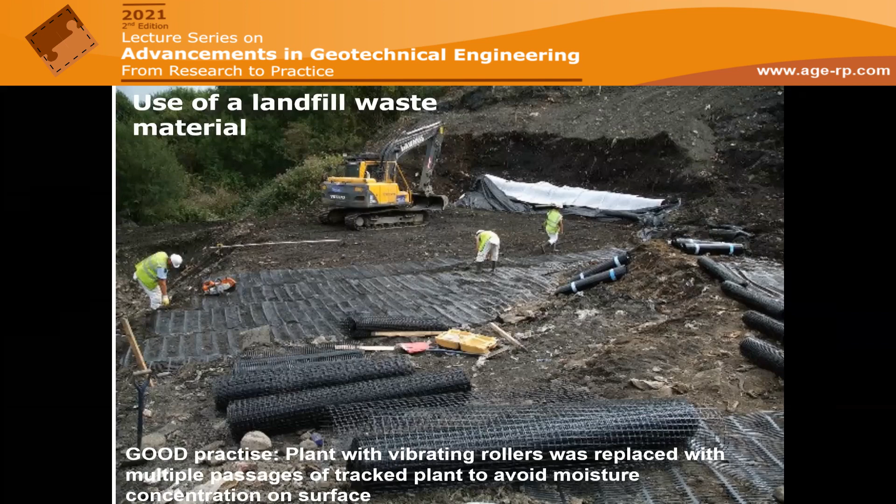And this is the surface. They put a thick clay layer on top to safely bury the contaminants, and they put vegetation, and this is the picture when it finished. There's a paper on that too, which I presented at a conference in Hong Kong.

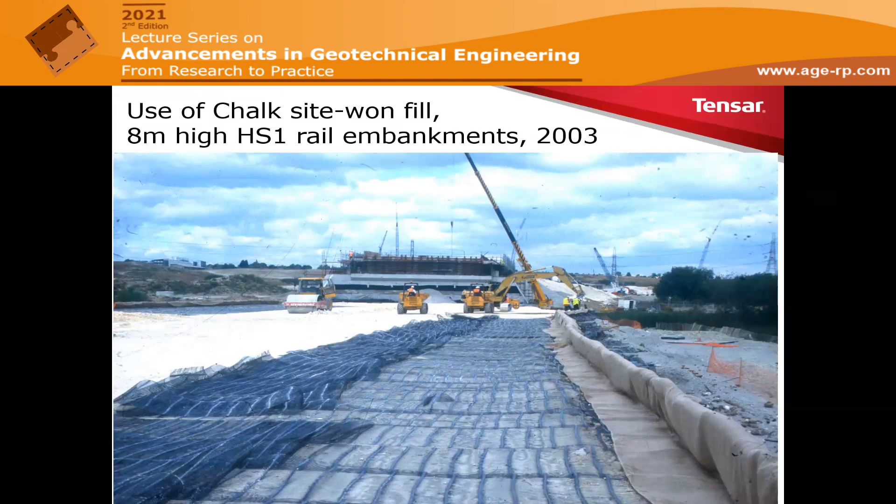Use of chalk - in the UK, south of UK, there's a lot of chalk, and the first time we used it was for High Speed One, the Channel Tunnel Rail Link, 8-meter high rail embankments in 2003. The lesson learned, or good practice we adopted: the chalk was very wet. Instead of saying we can't use it and asking for good granular fill, which would be very expensive and non-sustainable, we said we can add some lime. They added 2% lime, and that got rid of the excessive moisture, so we used the site-won chalk.

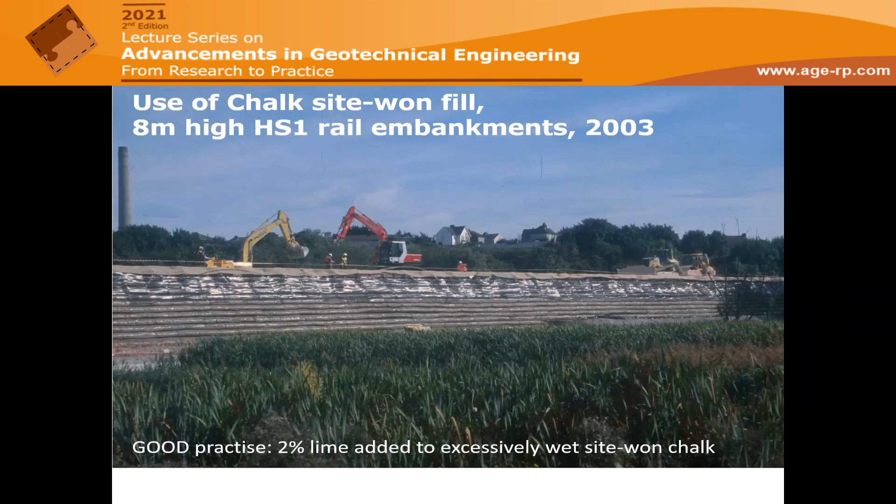The last material, an unusual non-standard fill, is called Leca, lightweight aggregate. I don't know if anybody in the audience has come across this material. It's basically clay, most of the time like marine clay, and it's kiln fired at very high temperatures, in excess of 1000 Celsius. This creates an incombustible porous ceramic material, and being porous makes it very light.

Normal granular fill has a density of about 18 to 20 kilonewtons per cubic meter. This material is a quarter of that - about 3.5 to 5 kilonewtons per meter cubed. But it's got very good shear properties, up to 39 degrees, though typically we'd use 37. Because it's light, the bearing pressure it applies on soil and foundations is very small, and therefore in weak foundations it eliminates or reduces the need for piles. It's also got a good design life in excess of 100 years.

And that's what it looks like, and that's what it looks like in cross section. It's placed pneumatically and doesn't need any particular heavy compaction, because it's compacted just by the traffic of the lorries that bring it on site. As I said before, it's very good for weak foundations because it reduces the need for piles.

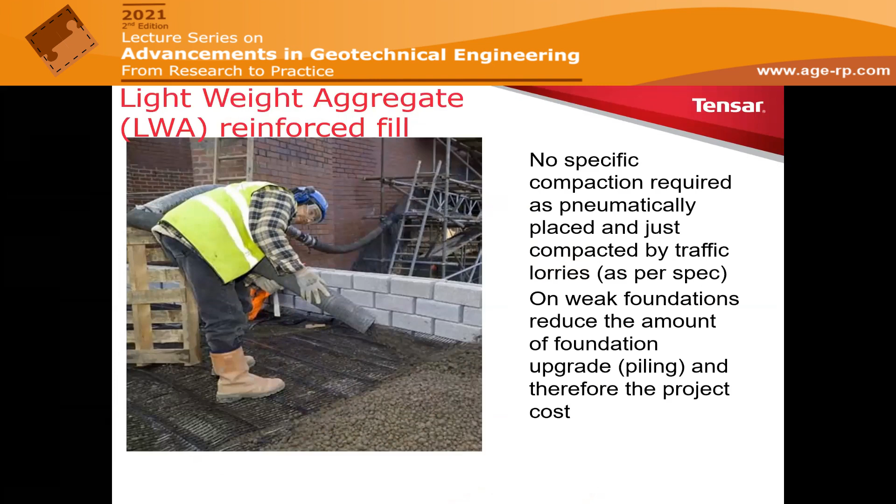But one thing you need to be wary of, and need to test, is sliding and pull-out coefficients with whatever geogrid you're going to use. Tensar used this material - we were the first to use it, and we'd only use this material because we've done all the testing and know the sliding and pull-out coefficients to use. You can see here one of the applications, and another here.

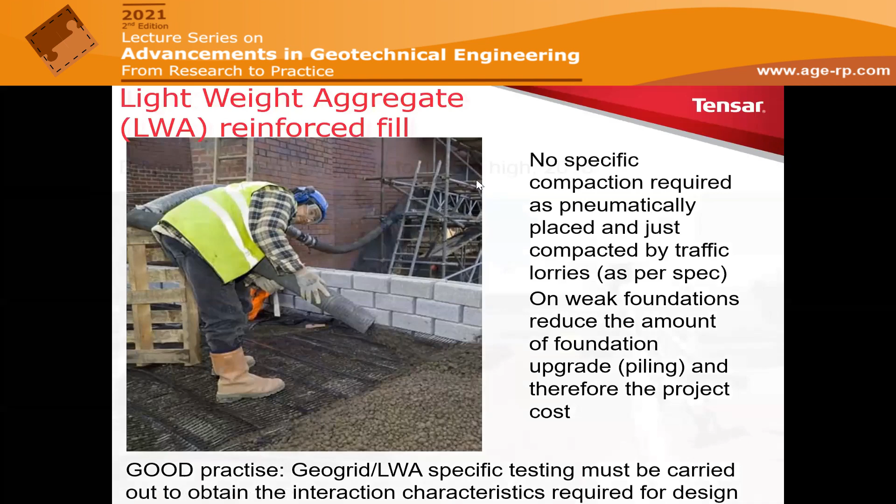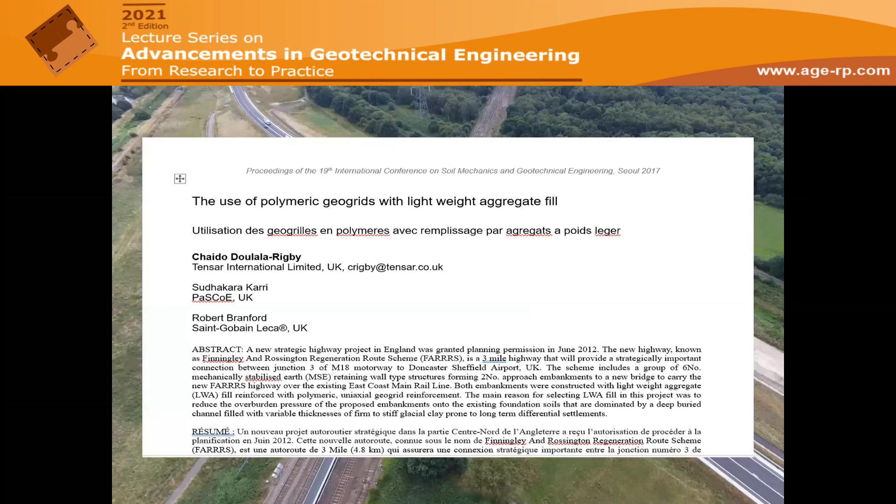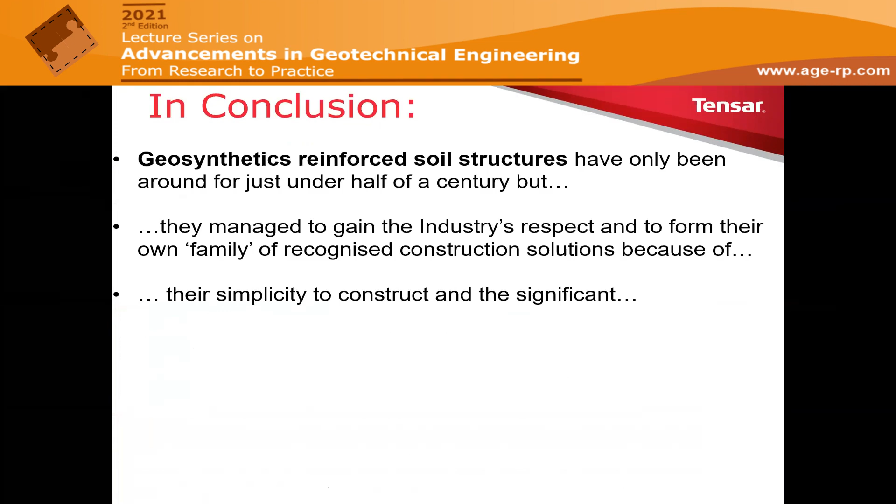In conclusion, geosynthetic reinforced soil structures have only been around for just under half a century, but they've managed to gain the industry's respect and form their own family of recognized construction solutions because of their simplicity to construct and the significant value they add in every project. They lower cost, because instead of importing good fill material, we can use what's available on site. They reduce delivery time because compared with reinforced concrete, there's no curing time needed since it's dry laid. And of course they improve sustainability, for all these reasons.

Sustainability ties in with the UN's 17 Sustainable Development Goals and the Paris Agreement in 2015, which many countries, I'm sure including India, signed in Paris in 2015 - 196 countries to be precise. These UN SDGs are coupled with individual manufacturers taking steps specifically for their own production of products.

For example, Tensar - we are very proud that since October 2012, all our manufacturing plants and the energy they use is 100% renewable. We made the switch because we're very conscious towards Shaping Zero, which is ICE's theme for this year, and decarbonizing our construction, and of course addressing the climate emergency that everybody is talking about - the time for action is now.

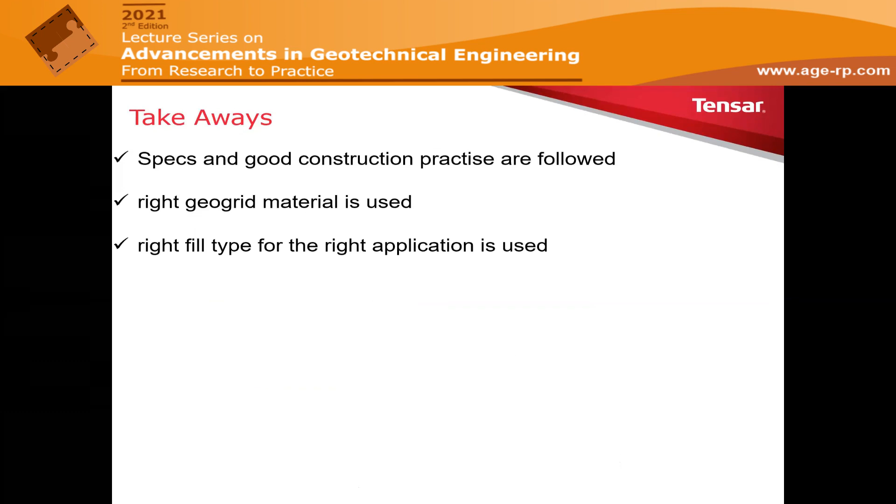These are the takeaways of today, the last slide. The specs and good construction practice must be followed when you design MSE walls. The right geogrid material must be used, and the right type of fill must be used for the right application. Appropriate compaction must take place. Good workmanship is very, very valid and important. Appropriate site validation testing and control must be observed at all times, and drainage and scour protection must always be provided.

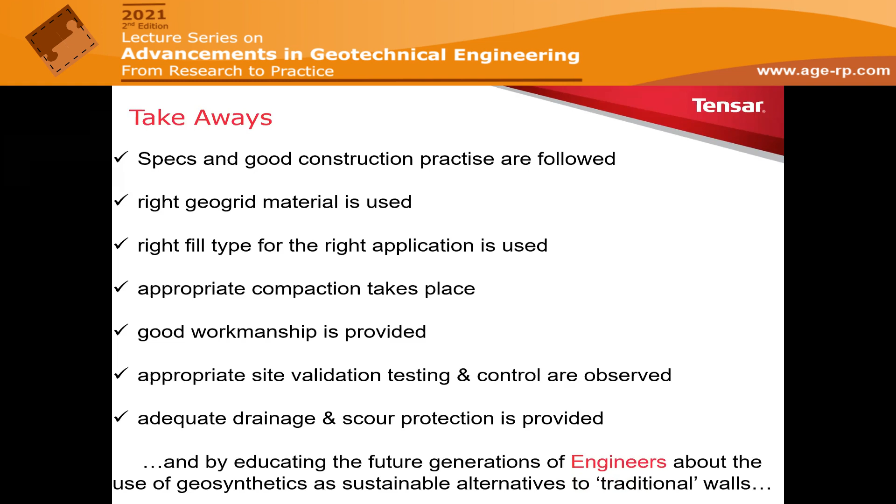The last thing we have to do cumulatively as an industry, and this is something I do a lot as a STEM ambassador, is to educate the future generation of engineers and tell them that geosynthetics are sustainable compared to other traditional walls. I'll leave you with this picture of events around schools and colleges in the UK where I let people use geogrids - this is one of our geogrids - and make them build little sandcastles, as I call them, and rest a bottle of water, 2 liters, on top. You can see the one with the geogrid stands up, the other one collapses.

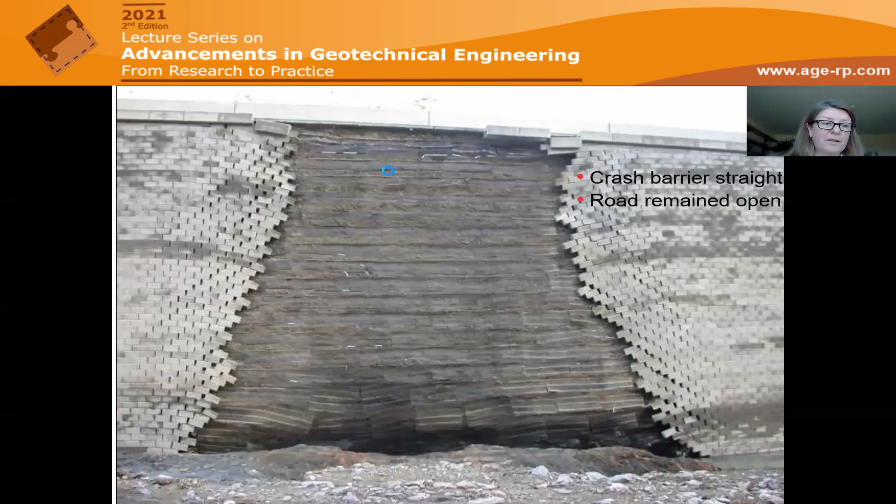And that's it, sorry, and I found the picture. So what we showed before was this one, and the next slide should have been this one. So they took down - can you see, you can just about see the 45-degree angle - where they took all the loose blocks, and we created a specific reconstruction sequence, and they did it, and that's it. I'm sorry, that should have been there. I apologize, but hey, worse things have happened, but this is what I wanted to show.

So back to the question of the gentleman that asked - they just wanted to have exactly the same facing. And while they were on site and had all the equipment in place, they did it like this. But as you can see, you can do it this way: you can just take the blocks away and put them back together again.

Okay, second question is from Jay from AECOM, New Zealand, and he wants to know what is the relative cost difference between the LECA fill and other lightweight fills like scoria.

Good question, I don't know the answer. I know that LECA is more expensive - he's talking about the lightweight fill, right? Yes, and the question is relevant because it depends how far it needs to be transported, since I think it's originally from Norway.

But what you have to remember is it's not just a simple comparison between granular fill and LECA, it's about saving on piles. In the 12.5-meter project in England, the contractor had already installed the piles and realized they'd underestimated - the piles couldn't take the weight of granular fill over a 12-meter high wall, about 240 kPa on top. So they had the choice to remobilize a new piling rig to add piles, or go for a different option.